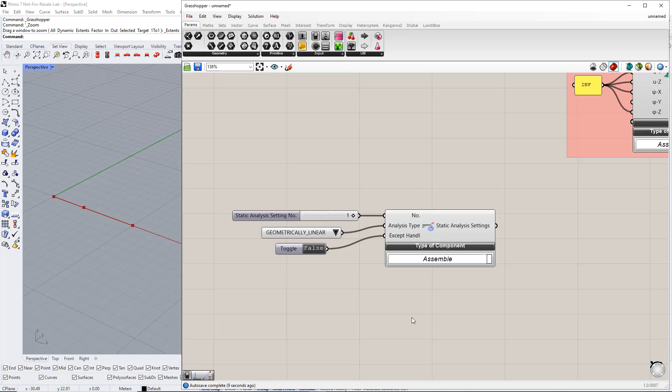Afterwards, we want to create load cases using the load case component in the Dlubal tab. For this example, we would like to create 2 load cases. The first will be self-weight and the second will be imposed load. Next, we will enter all the inputs required for these load cases.

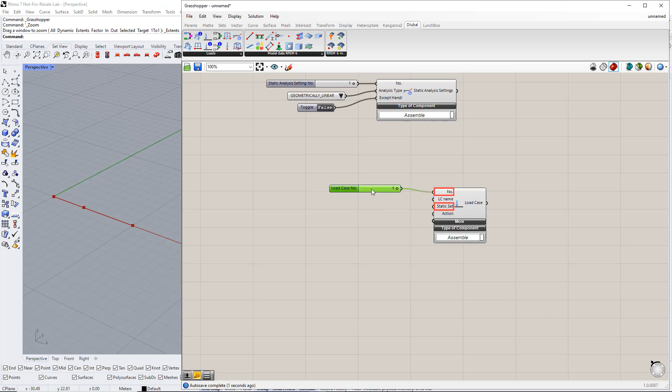We will start with the first load case. We enter number 1 for the load case number and static analysis settings using the number slider command. We enter self-weight for this load case name using the panel command.

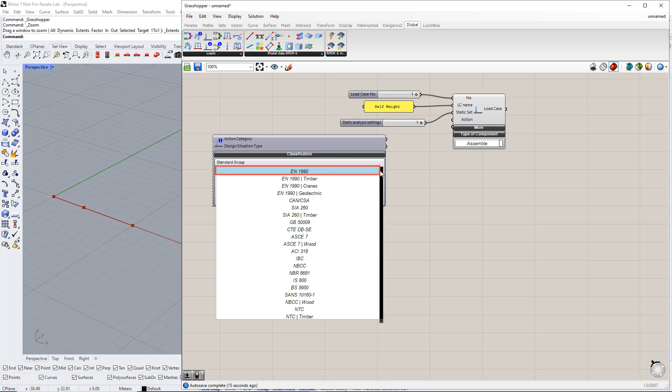In order to define an action category, we need another component, which is called load case classification. You can find it in the Dlubal tab. For this component, we have to select the standard group, for example, EN 1990. Action category, permanent. And design situation type, ULS, permanent and transient according to equation 6.10.

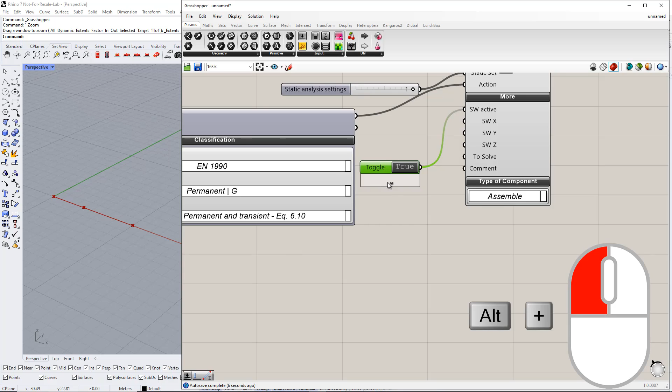To activate the self-weight and the load case to solve, we insert the Boolean toggle command and set it to true by double-clicking it. Now, we would like to copy this load case by holding the Alt key and dragging after selecting all elements.

Afterwards, we need to modify some parameters for this load case. We enter the number 2 for the load case number. The load case name has to be changed to imposed load. We have to disconnect the self-weight for this load case by holding down Ctrl and dragging. Otherwise, it will be calculated twice.

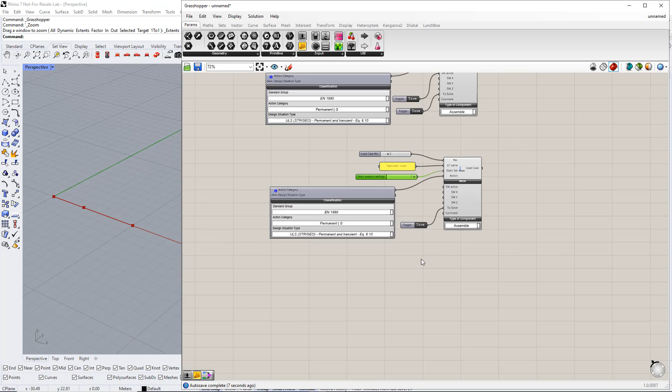We also want to change the action category. For example, we select imposed load category A. Now, we connect each component to the RFEM component by holding the Shift key and dragging.

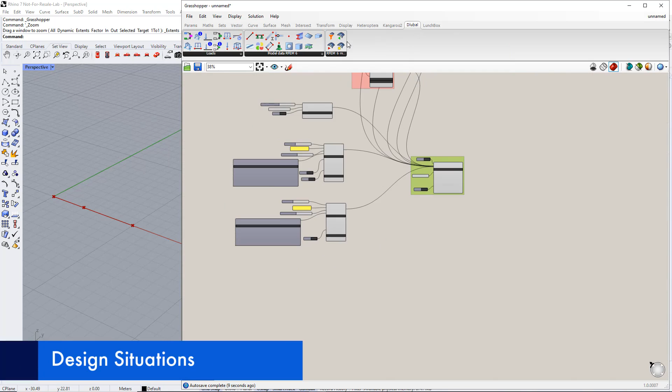Next, we need to create design situations using drag and drop for the design situation component in the Dlubal tab. In this example, we will define 2 design situations. The first will be ULS, ultimate limit state. The second will be SLS, serviceability limit state.

For this component, we also have to enter the number and the design situation name and type. For the number, we enter 1. And for the name, we enter ULS.

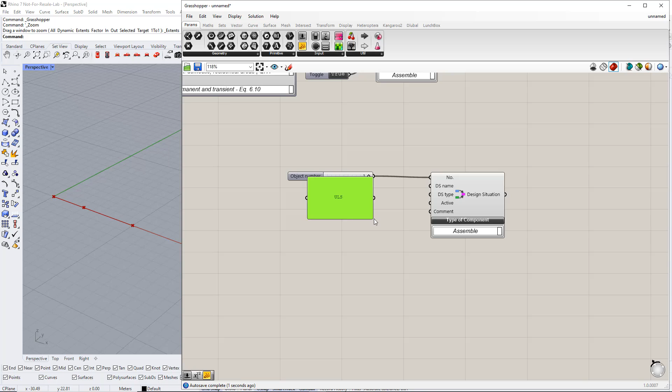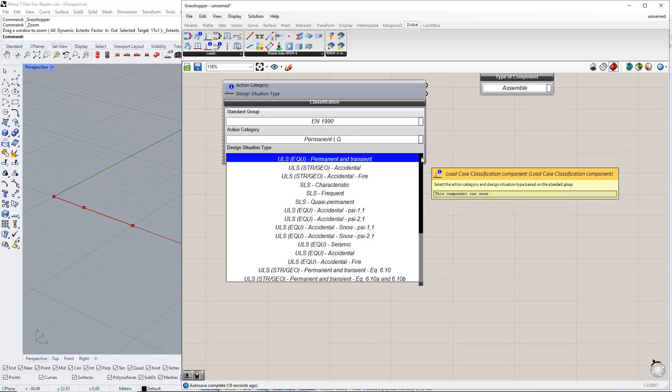For the design situation type, we need to insert another component, which is called load case classification. We enter EN 1990 for the standard group. Permanent G for the action category. And ULS permanent and transient, according to equation 6.10, for the design situation type. Then we connect one design situation type to the other design situation type in the component.

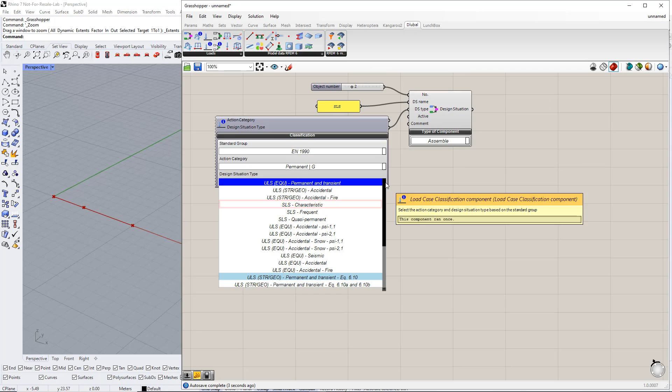To create the second design situation, we copy the first one by holding the Alt key and dragging after selecting all the elements. We have to change the number to 2, the name to SLS, and the design situation type to SLS characteristic. Afterwards, we connect both components to the RFEM component.

In the next step, we will create load combinations. Therefore, we insert two components. The first is load combination, and the second is load combination items.

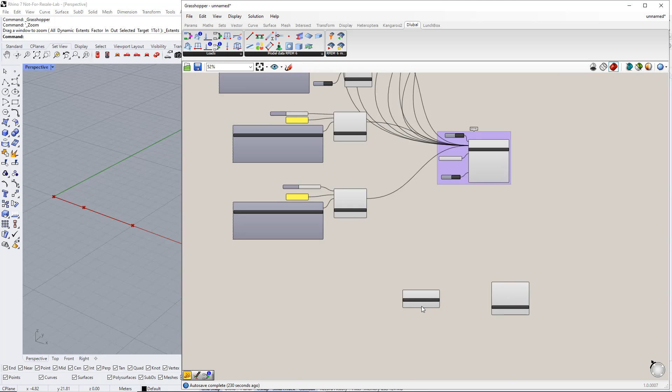We need to enter the numbers and factors for both load cases. We can do this using the panel command. Make sure to select multi-line data by right-clicking the panel. Now, we enter the numbers of the load cases for the two design situations, ULS and SLS.

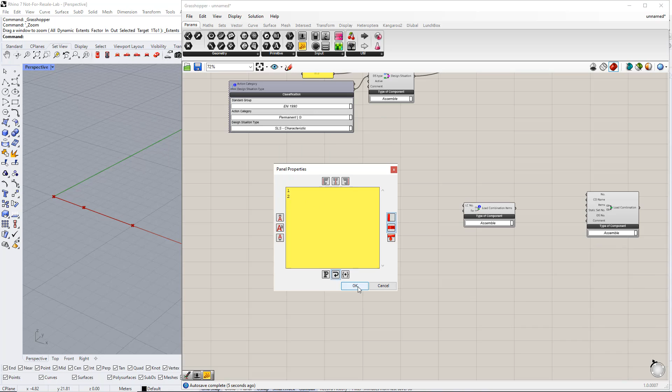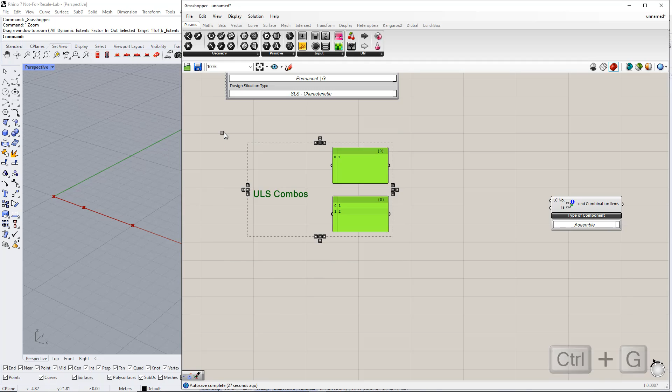For ultimate limit state load cases, they will be combined as follows. Load case number 1. Load case number 1 plus load case number 2. We name these combinations by inserting the scribble command, which you can find in the Params tab. Now, we write a name, ULS combos, and make a group. We repeat this for the serviceability limit state and change the name to SLS combos.

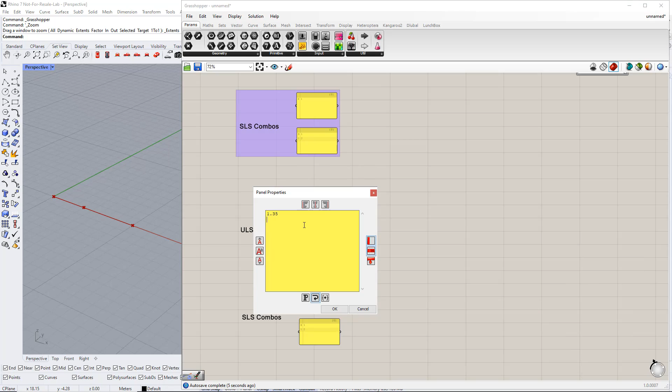The same procedure will be applied for the factors. We enter the respective factors as follows. 1.35, 1.35 plus 1.5 for the ultimate limit state. 1 plus 1 for the serviceability limit state.

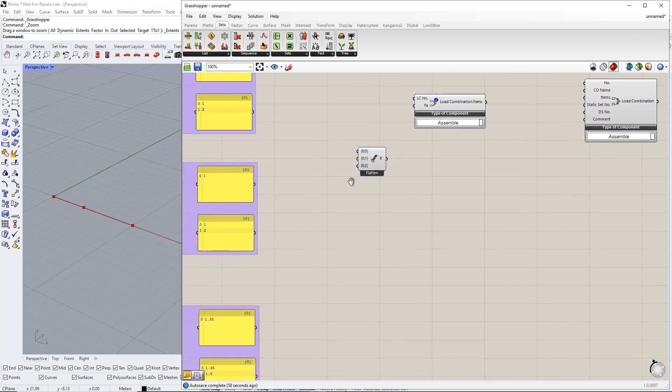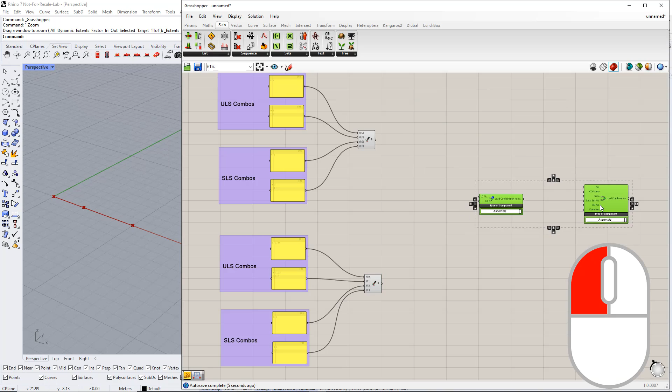To create combinations, we have to insert the entwine component. As you can see, we have 4 inputs and 3 branches. Therefore, we need to add a new branch by clicking the plus sign. Now, we connect all inputs to this component. We insert the panel command to read the information in this command.

After that, we connect the load case numbers to the load case number in the load combination items, and the load case factors to the factor in the load combination items component. As you can see in the panels, 0, 0 from the first panel will be combined with 0, 0 from the second panel, and so on. Then we connect the load combination items component to the item in load combination component.

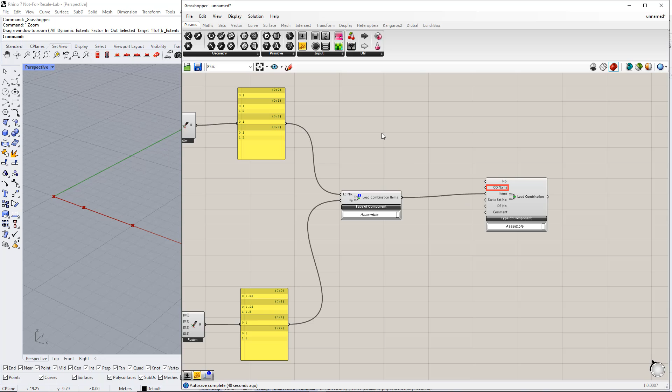Then, we enter the load combination name by inserting the panel command. We have 4 combinations, 2 for the ultimate limit state and 2 for the serviceability limit state. Therefore, we enter CO1 ULS, CO2 ULS, CO1 SLS, CO2 SLS.

For the design situation number, we enter 1 and 2, because we have 2 design situations. This means that the ultimate limit state combinations will be connected to design situation number 1 and the serviceability limit state combinations will be connected to design situation number 2. Make sure to set the multi-line data for the panels and set the graph for the combination name and design situation number to get the right load combinations.

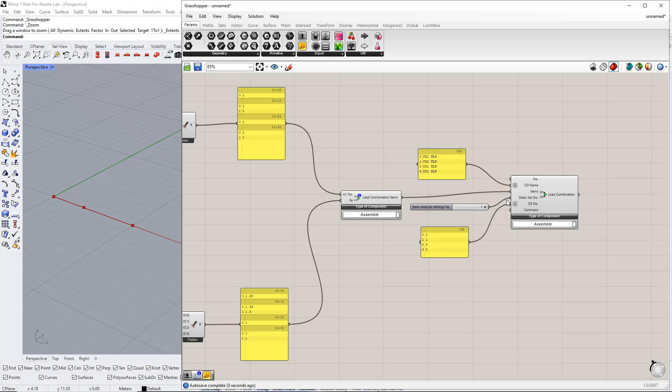We also have to enter the static analysis settings number. For that, we enter number 1. After that, we connect the load combination component to the RFEM component.

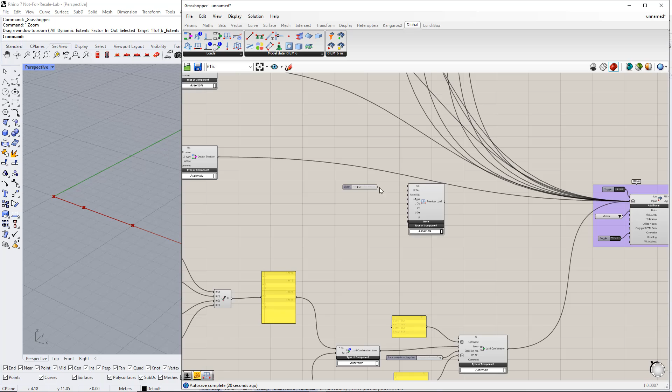In the next step, we will apply the load on members as imposed load. For that, we need to insert the member load component from the Dlubal tab. We enter the load case number. In this example, we enter the number 2 for the imposed load. We also need to enter the member number. We have 2 members, so we enter 1 and 2 using the panel command.

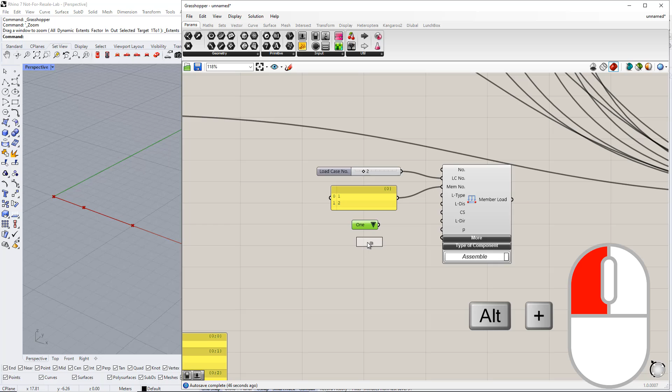The load type, load distribution, and load direction can be defined using the value list command, as you can see. For load type, we select force. For load distribution, uniform. And for load direction, global Z, or user-defined W true.

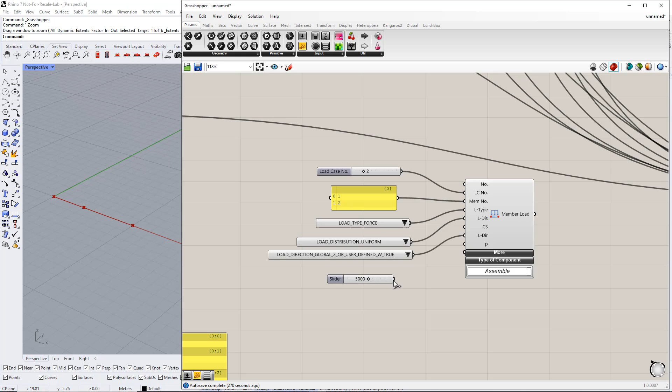To enter the load magnitude, we will insert a number slider command. Be sure to enter the load magnitude in Newton. For example, we enter 5,000 newtons. Next, we will create groups as we did in the previous video.

After connecting all components to RFEM 6 component, we double-click the Boolean toggle command to perform the export. As you can see, we need to reverse the direction of this load using the negative component. You can find it in the Maths tab.